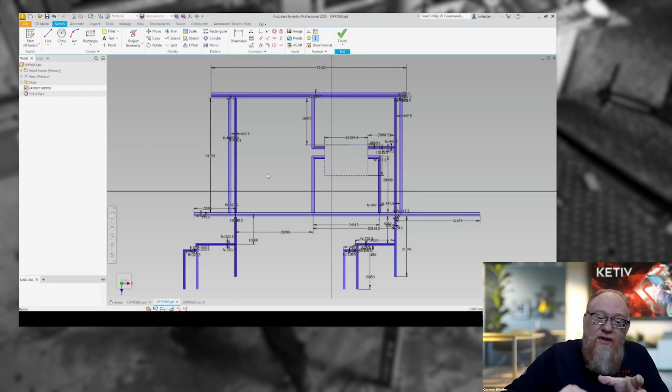So here's an example of a trench layout where the user goes through and sketches everywhere they want trenches to be, sketches the lines that represent the center lines of all the trench runs, and then they can dimension it, size it however they need to fit the project requirements.

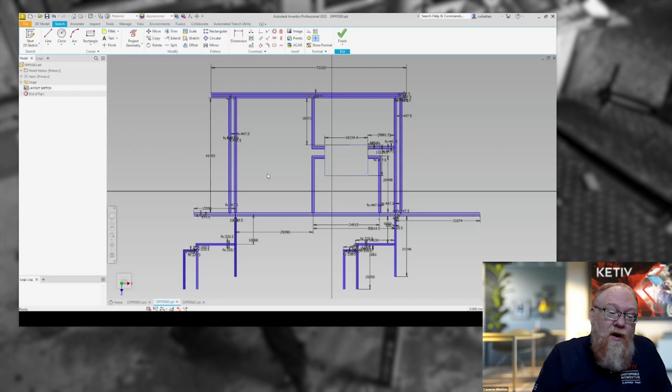And then the next step is where the automation needs to take over, is the automation needs to understand that layout sketch. So we built a process where the user would then go into this layout sketch and tell the automation, okay, these specific sketch lines represent trench center lines.

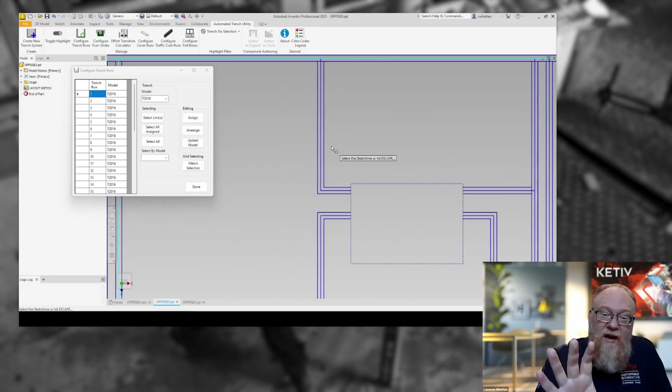And the user has several trench sizes, trench models to choose from, so they'll choose which model they want to assign to each sketch line. Here I'm going through and doing that - I've just sped up that process a little bit. But once that process is done, now the automation can understand these specific lines are the ones it needs to look at to assign a trench model to build, to understand and interpret the layout sketch correctly.

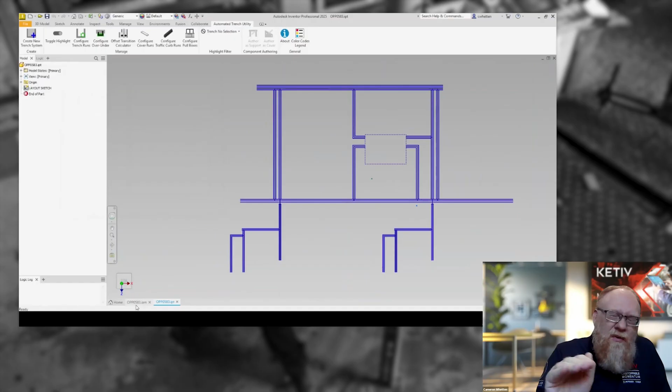And then once they've finished doing the layout sketch, there's also some other tools you'll see at the toolbar at the top - a custom toolbar we've built for Oldcastle that provides several tools they can use to assign the trench models like we just saw, but also to configure the different options for covers. Like Keenan mentioned, there's different models and different duty ratings for the covers. The user has the option to configure things like that, as well as configuring other accessories or items like traffic curb and that sort of thing.

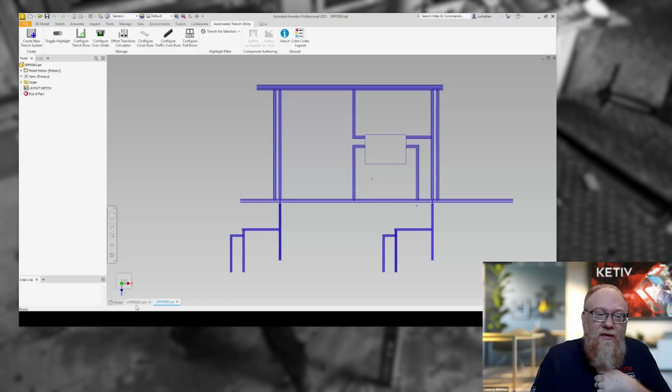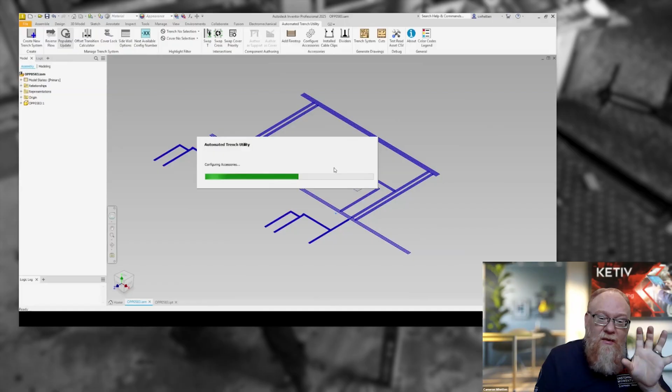And once the user is finished configuring the layout sketch, then they switch back to the trench assembly, and it's time to actually populate the trench assembly with pieces of trench. So that's the process that's going to happen here - switch over to the custom toolbar and hit the populate update button. And what this is doing is now the automation is fully kicking in and doing its thing. One of the things the automation has to do is interpret the layout sketch and understand all the different types of intersections it can encounter.

Like Keenan mentioned, you can have 45-degree bends, 90-degree bends, some custom angle in between. There can be T intersections, and sometimes cross intersections where 4 different trench runs come together at a point. So the automation needs to understand all of that about this layout sketch.

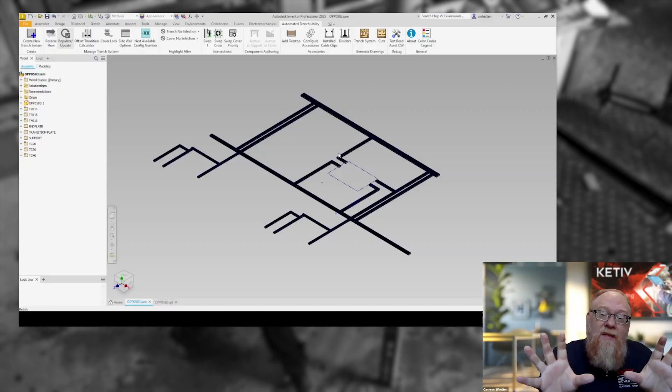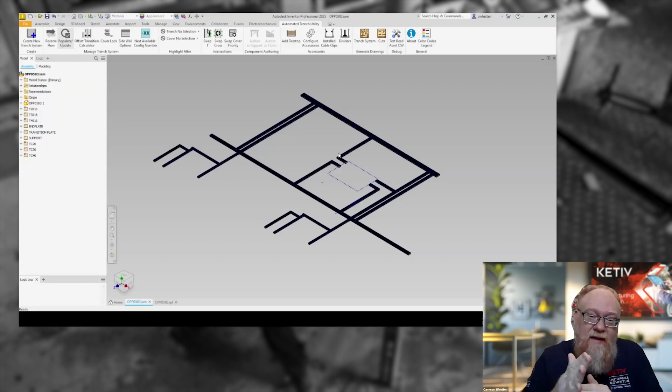We've built through the code the ability for it to interpret intersections between sketch lines and understand all that. Then it has to know if it's a bend type intersection, so it needs to make an angled miter cut at that intersection between the two pieces of trench. Or if there's a T that comes in, there needs to be an opening cut into one of the trenches.

It interprets all of that, does that, and then also has to figure out how long each piece of trench needs to be to get dropped in, how long the covers need to be, how many covers there are, and if the covers need to be cut at an angle or not.

It also has to add supports for the covers, like Keenan mentioned. At some intersections, a steel support is required to support the covers. The automation understands that, knows what size of trench it needs to fit, what type of intersection it's dealing with, and then what size or model of steel support needs to be dropped in.

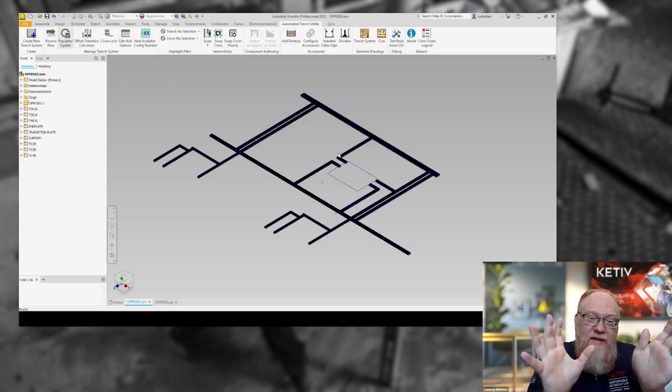After it's interpreted all of that data and understands what it needs to build, it actually builds it and starts building the actual individual part models for each trench and cover, places them in, constrains them, and builds out the assembly.

As you saw, that process was very fast. I did speed it up for the purposes of this demonstration, just so we weren't waiting through the whole process. But in reality, when I was recording this video, that process took 6 minutes to complete. That's the process that Keenan pointed out was the part that takes the most time for their users, actually building out the assembly.

I don't know exactly how long, if this is one of the smaller ones, or probably more a medium-sized project. So I don't know exactly how long it would take for their users to do that, but hours at least to build out a trench system like this. And the automation was able to put that together in 6 minutes.

So Keenan, a project like this, what we're looking at, from a scale standpoint, how big is this? What area are we looking at? It's hard to see on screen, but I kind of know where these projects go. How long are these trenches? How wide? Can you talk a little about what we're looking at here?

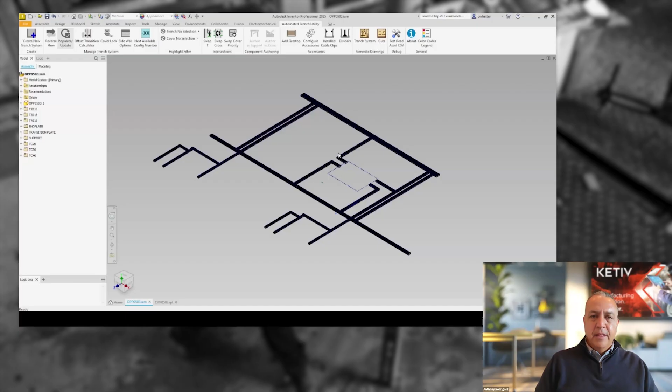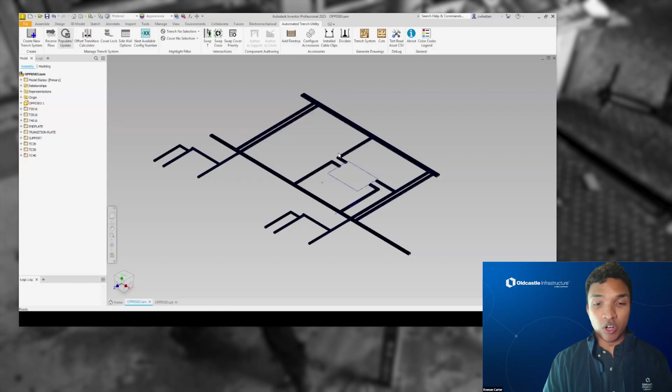Yeah, so each single piece of trench is 3 meters long, so about 10 feet long. I don't know if you can see it here because we're kind of zoomed out, but I can let the video play a little further and it will zoom into more detail if you want me to do that. That'll give you an idea of scale as this video plays. Each one is 10 feet long. Oh great, okay, there we go. Yeah, you can see that a little bit better.

And a project like this with multiple sizes and multiple different intersections, and I think there are multiple cover types on here, this is easily going to be a week.

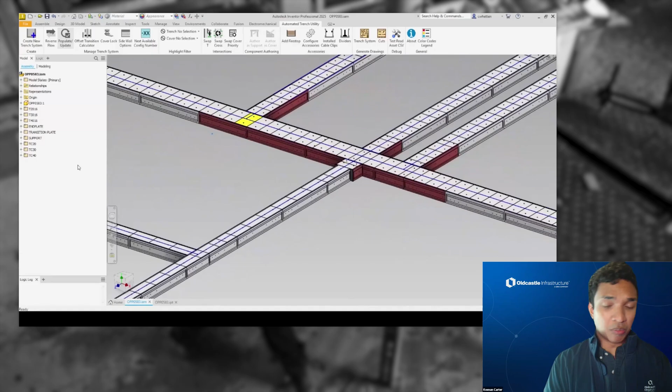Okay, and Caitlin, your team, we know your team and Keenan's team are involved in this. Who else is involved in a project like this? What other teams are you interacting with to get these proposals out the door?

So we're working directly and very closely with our customers directly, with our commercial teams, so our sales organization. We're working with our customer service group. And then we also work really closely with our operations team, those that are actually manufacturing the trench. So cross-functionally for a project, we're working with many different faces.

Yeah, and how has the automation helped there? How has it helped in a team environment like that, where there's multiple people and there can be confusion when things aren't clear or undocumented? Have you seen benefit to working with them amongst the team?

I'd say one of the biggest things that we see is the reduction in revisions. And that's a lot of where our internal pain points were really residing, that anytime you had rework or revision, that was multiple back and forth between those different functions. So using this tool, we're able to bring that revision rate down, and now we're creating a clearer picture for those groups that we're working with and less iterations.

Yeah, that's great. And it brings a certain level of confidence, I'm sure, as the teams work together and build their relationships. Great, Cameron, I didn't mean to jump in and cut you off there, but why don't you proceed? We're looking forward to seeing the rest. Okay, no problem.

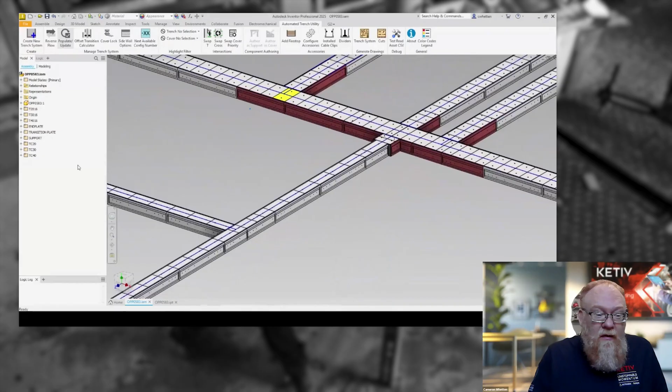So as you can see here, we just got a quick overview of what the assembly has built with all the covers and trenches. We've got a few color coding options to communicate to the user about something they might have to take a look at, with the red and yellow trenches.

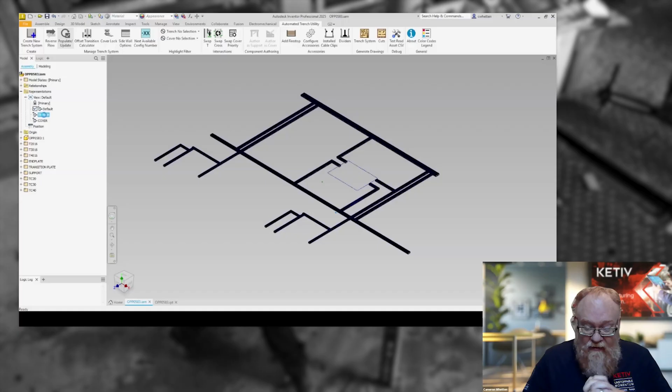And as you can see up at the top, the command bar that I mentioned before, that's a custom toolbar we built for Oldcastle Infrastructure. It allows the user, once they've built the assembly using the automation, to make changes, manipulate it, and add accessories like cable clips, dividers, anchor bolts, and other hardware. We've built tools that allow them to manage those.

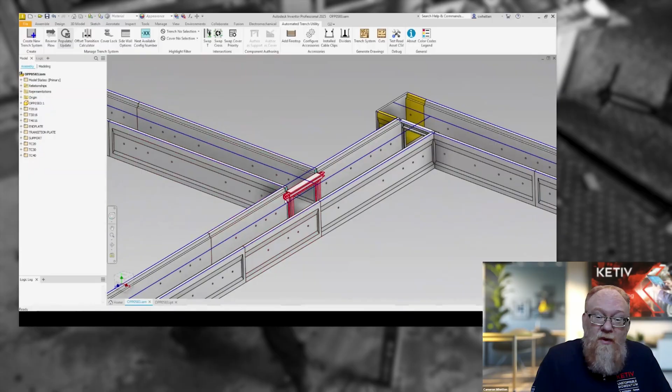Another thing the tool does is automatically create the fabrication drawings. There's a quick view of the steel support we were talking about before, that has to support the covers. The covers have been turned off here so you can see those, and there are some end plates and different accessories. But one of the things the tool does is build the fabrication drawings.

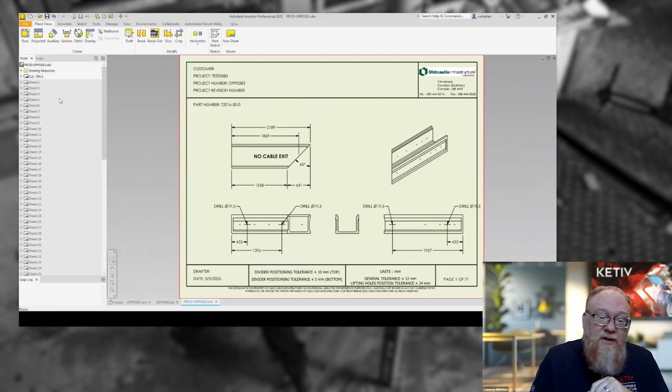So that's what this is going to do here. We're going to run through the process, and again this was slightly sped up for the purposes of recording this demo, but not much. It took maybe about 10 seconds to run through that process in real life. What you can see here is it's built out for every piece of trench in the assembly, not just a standard full-length uncut piece. It's built a fabrication drawing for each piece of trench and cover.

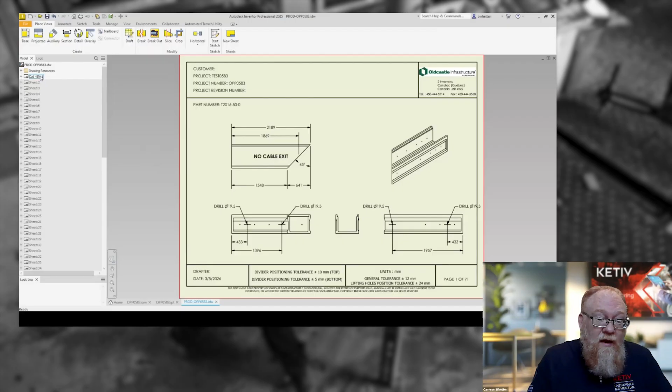So anything that has an angle cut or an opening cut in the side, like for a T or a cross junction, that piece of trench has its own fabrication drawing with dimensions, so Oldcastle Infrastructure can send that to their fabrication shop to get the pieces built. We'll flip through a couple examples of the drawings generated here. This is over 60 sheets created in a matter of seconds, so massive time savings for the user.

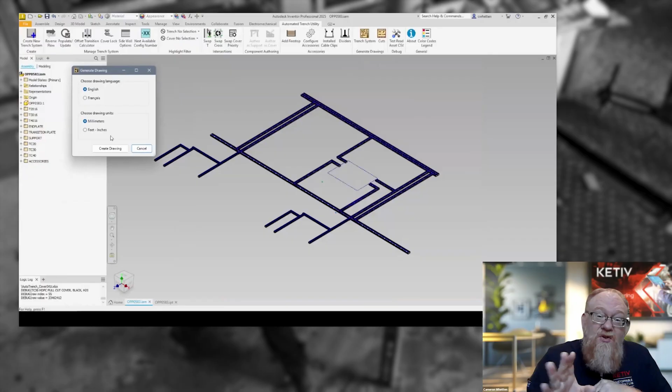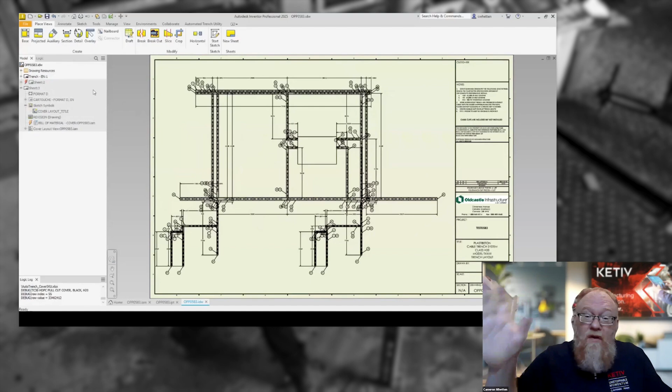In addition to the fabrication drawings, it also generates a full trench system layout assembly drawing, and that's what this is doing here. Again, slightly sped up for the demonstration but not by much, it probably took about 10 seconds for the full generation process. What it's built here is a layout view of the entire trench system with all the dimensions and item balloons pointing out all the various pieces that go into building this assembly. It was all generated automatically.

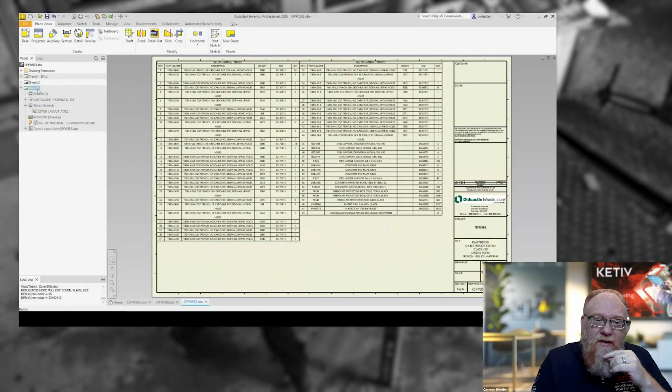It also built a bill of materials for the full trench system in this case, you can see that there, and then another sheet for the covers specifically with the bill of materials for the covers. That drawing process, like I said, takes about 10 seconds to generate the full trench system drawing.

And then the user still has to go in and do a little bit of cleanup, because the automation sometimes has dimensions overlapping or item balloons overlapping with certain things. So the user has to do a little cleanup, but it massively improves the throughput of their engineers.

Well, thanks for sharing that, Cameron. That was great to see exactly how it works, what we're automating, the different documentation, and it really is a complete package that engineers can now share with their extended team.

Cameron and Keenan, can you talk a little bit about when you went live? It's in production now, you're using it. How was the adoption, what sort of training, how did users embrace it, and maybe some of the results you're seeing today? I'd love to touch on that. Change management is a large study, and it's a lot of work to get everybody on board for a big change like this one.

So we had a pretty robust launch plan. Before launching, we had everybody get trained, and as they were training, they gathered all their questions and were already in communication with Cameron. Cameron put together a series of really strong videos on how to use the tool, how to do different types of layouts, even covering niche situations that he knew they were going to encounter. He already had videos prepared for that.